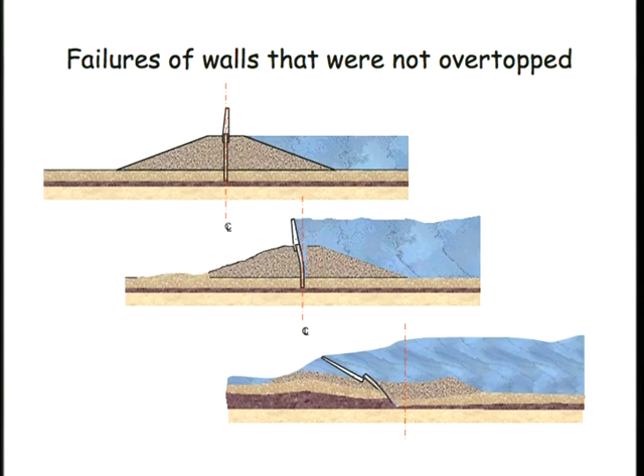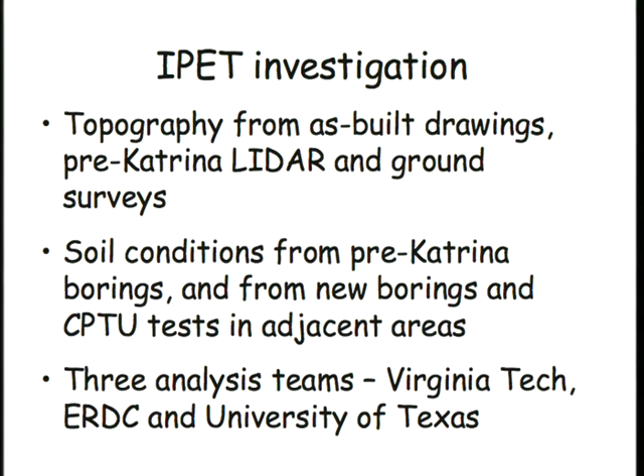The IPET investigation enjoyed a great deal of resources provided by the Corps of Engineers. We had topography from as-built drawings. We had pre-Katrina LIDAR and ground surveys. We had soil conditions from pre-Katrina borings and from new borings and CPTU tests in adjacent areas that were still intact. And then we had 3 analysis teams, Tom and I at Virginia Tech, the folks at ERDC, and Steve Wright at the University of Texas, all working to check each other, do quality control. Everybody did quality control on everybody else's work.

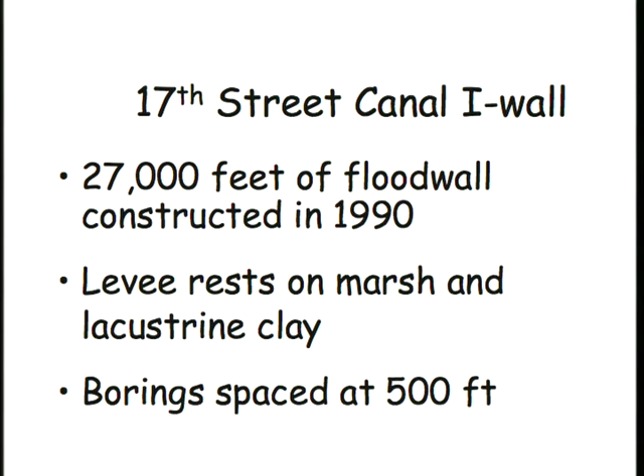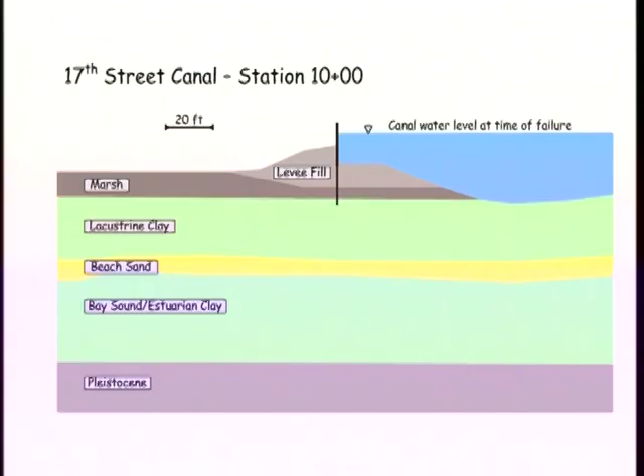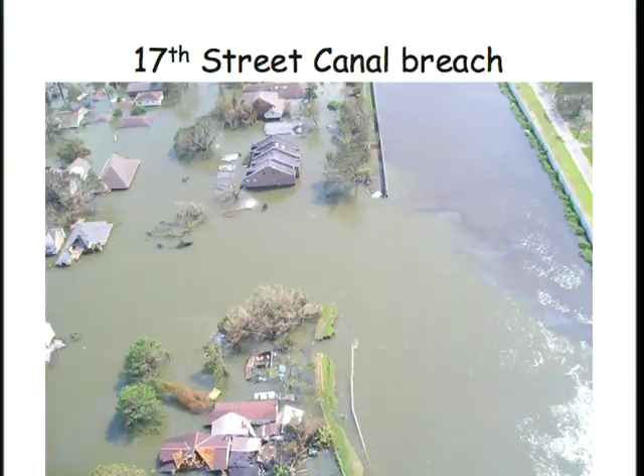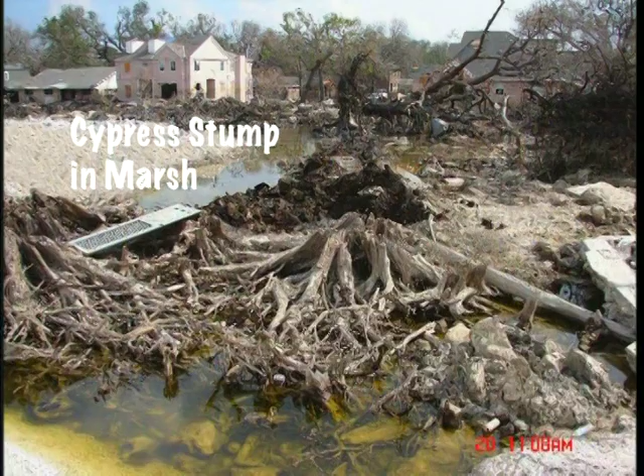The marsh, here you get a very good view of the material. It is highly organic and has a lot of properties similar to peat, but it also has cypress stumps within it. The marsh is material that accumulated and sedimented in a cypress swamp. And so there are remnants of those cypress trees in the marsh.

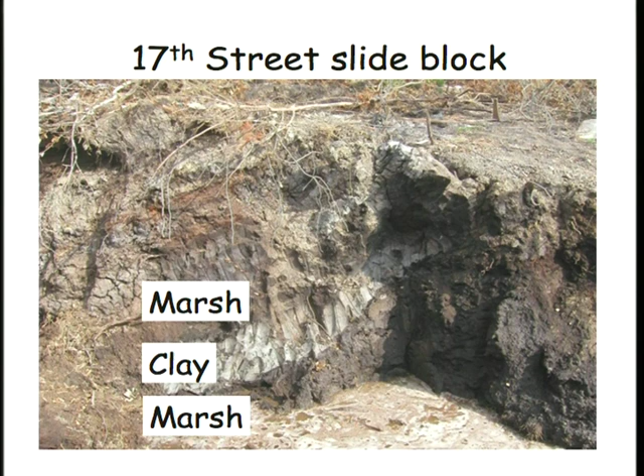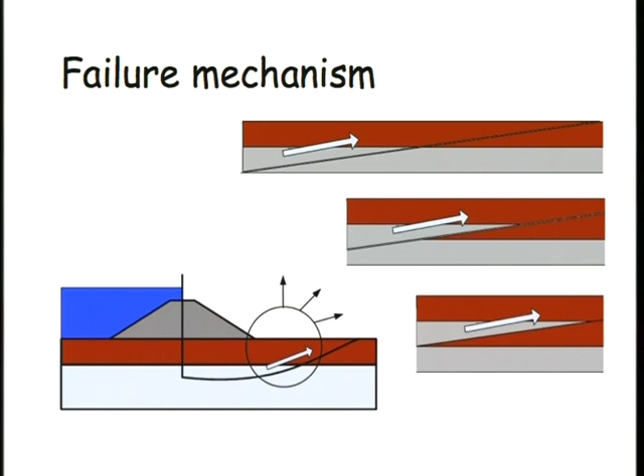Well, starting from something like this, during the failure, this I-wall and this soil in front of it moved inland, slid along a slip surface that would look something like this. So it started out in this position, and with that shearing movement, the chunk of clay was moved up in between two pieces of the marsh material, winding up in this position. And so this shows that the failure surface was down within the clay, and it is only through the failure itself that we wind up with the marsh, clay, marsh sequence.

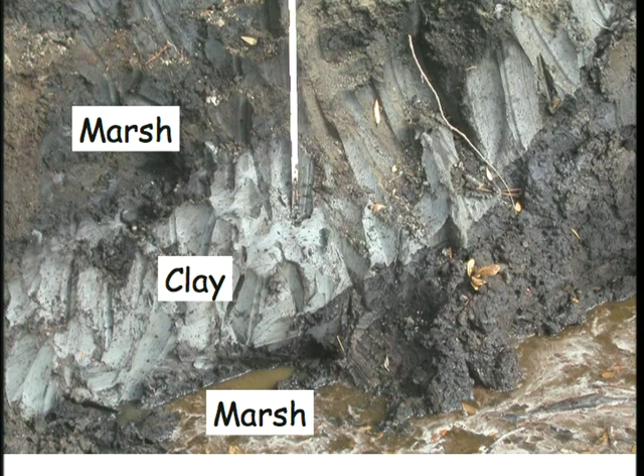Clearly then, the undrained shear strength of the clay was a key thing to understand about this failure. And one of the best pieces of data, it seemed to us, I say best because the scatter was much less for these piezocone tests than for laboratory tests on undisturbed samples. And within the interval of this cone profile, where the cone is penetrating the clay, there's very, very consistent data. And we used a method developed by Paul Mayne to determine the shear strength from the cone penetration results.

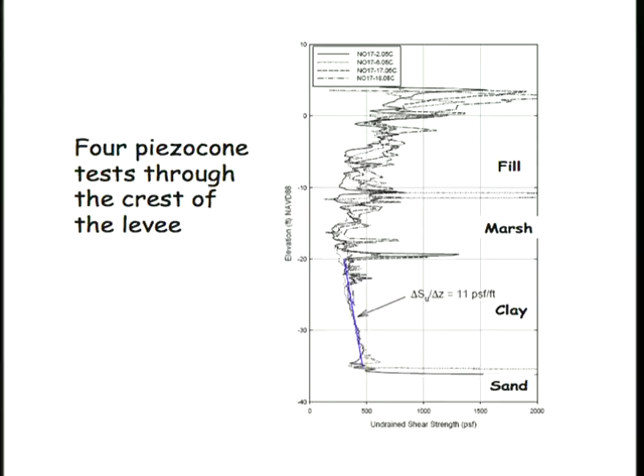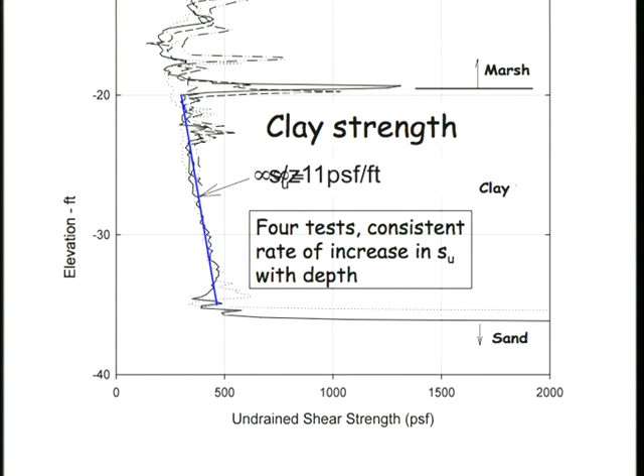The slope of this line here is about 11 pounds per square foot increase in shear strength for every foot you go down. Now that's a very common number. I tell my classes that this number should always be between 8 and 12. And if it isn't, likely something is wrong. And so that fit right within that picture, and these little traces here that don't deviate very much are from 4 different cone penetration tests. And we relied a lot on those cone penetration tests to tell us the shear strength of the clay.

Here's a comparison of a line, the shear strength of that clay, that's 11 PSF per foot going down there, superimposed on the results of laboratory UU tests on specimens from beneath the crest of the levee. The rest of the strength profile, this is the part that's in the marsh, and this part here is in the levee. Lots of scatter, but clearly stronger.

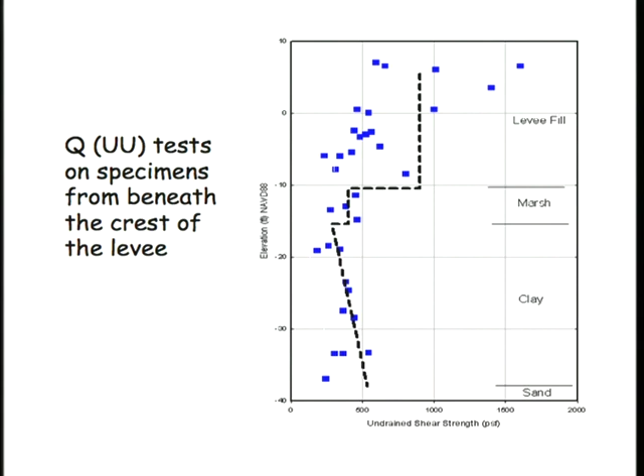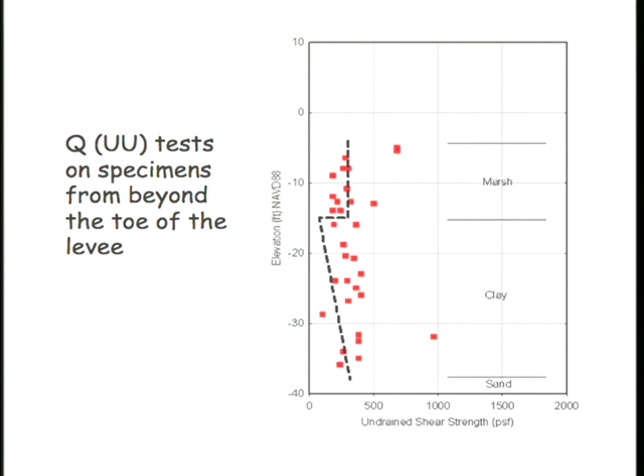And then these are UU tests on specimens from beyond the toe, where the clay had been subjected to smaller consolidation pressures. And this line then, this is the strength within the marsh here, and this is the strength derived or suggested by the cone penetration tests. Perhaps a little lower than the UU test, but a consistent variation.

And so putting those things together gave us what we call the IPET shear strength model. And the most important part of this is down in the clay, because the clay was the weak link. The clay increases in strength at 11 pounds per square foot per foot under the crest and also out beyond the toe. And the only difference is where it starts, and that's determined by the amount of overburden pressure, the pressure to which the clay was consolidated.

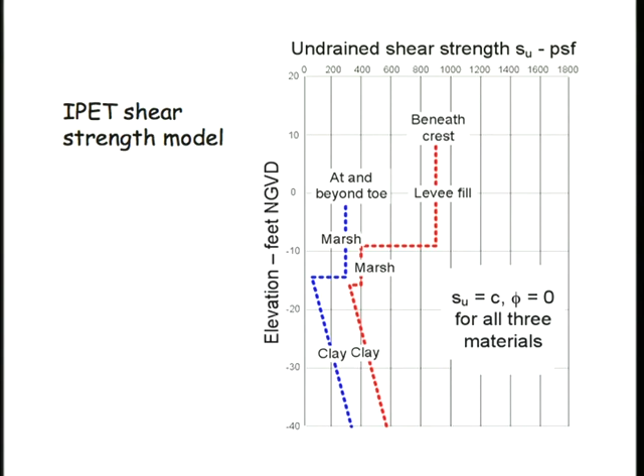Above that is the marsh, and beneath the crest of the levee, the marsh has been compressed very considerably due to the weight of the levee, and then this is the levee fill strength. Out beyond the toe, the marsh is thicker but weaker.

We can compare those lines with the strength profile that was used in design, and that's shown here. So up in the levee, a lower strength than we estimate is the best guess. Here in the marsh, very similar strengths and a similar increase of strength with depth. And then at below minus 20 feet, the district used a constant strength. Not a great deal of difference.

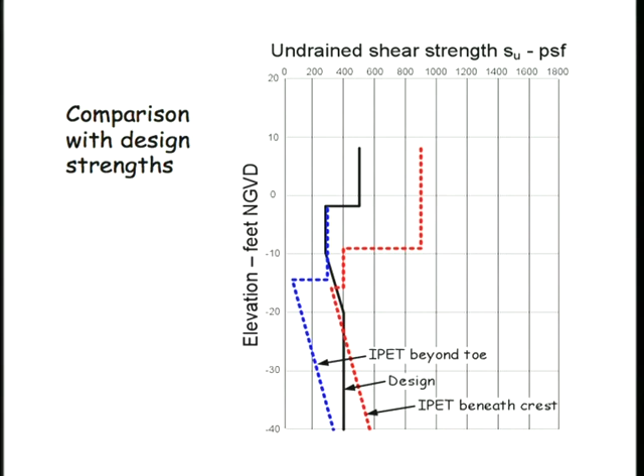In fact, the strength used for design, this black line, shows somewhat lower strengths than we estimate with all the benefit of hindsight. And then out under the toe, beyond the toe of the levee, a considerably lower strength. Now this black line, this was used beneath the crest, beneath the slopes, and beneath the toe of the levee. So we think that this black line is too high an estimate for those areas, but it is just about right or a little bit conservative for beneath the crest.

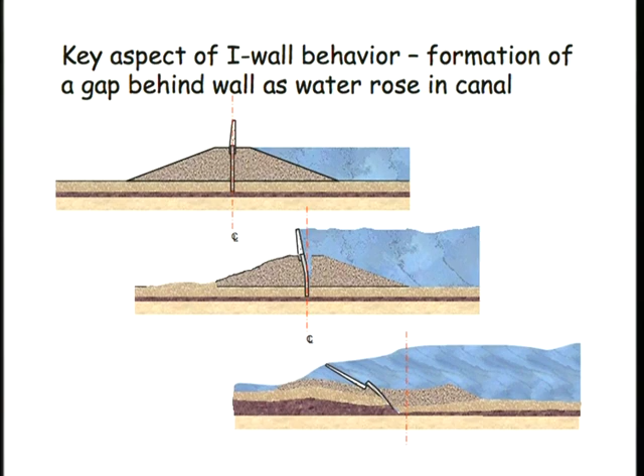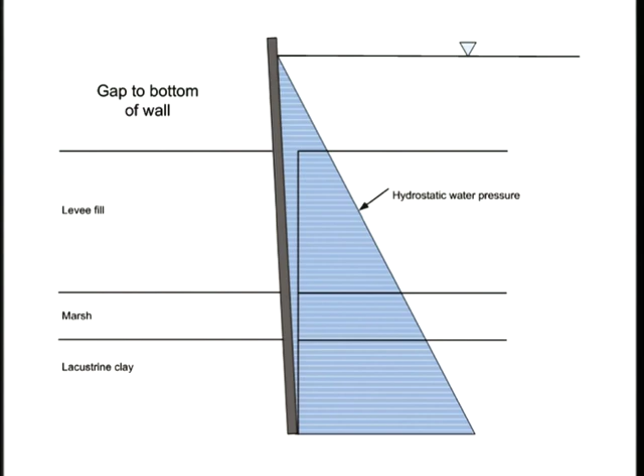But this leaves out what we believe is the most important aspect of the stability of these I-walls. And that is that as the I-walls deflected, a gap formed behind the I-walls. That gap was filled with water. The formation of the gap and filling it with water increased the load on the wall, and we had the wall loaded like this. Hydrostatic water pressure from the water level here to the bottom of the wall.

And if you think about it, this is a higher pressure than the earth pressure. Otherwise, the gap would not have formed. It's the fact that the water pressure is higher than the earth pressure that causes the formation of this gap. So when the gap forms, we're loading the wall with a greater load than just earth pressure.

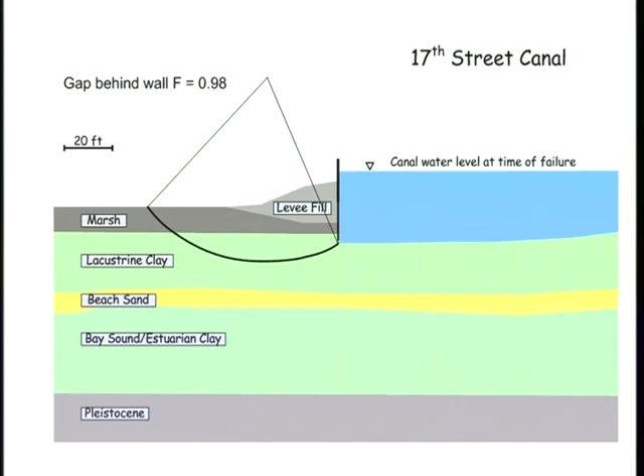And so the proper way to analyze that is to consider that with the gap behind the wall, there might as well be nothing but water over here. It doesn't matter how far it extends. It's water that loads the wall. And the slip surface stops at the bottom of the wall here. So this is a proper modeling of the failure mechanism. And this, combined with those strengths I've talked about, gives the factor of safety very close to 1.

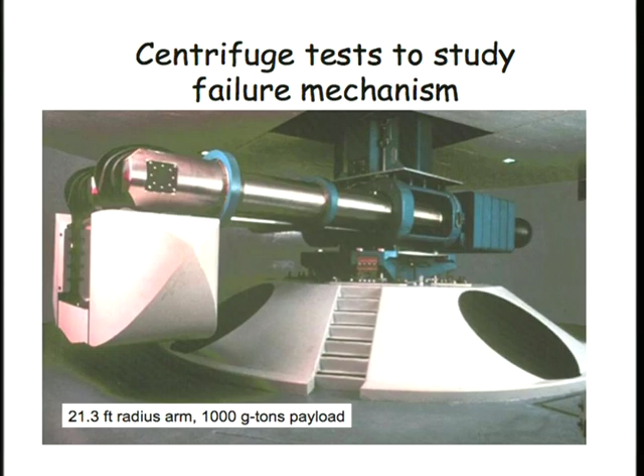Now, confirmation of this mechanism was given by the centrifuge test that Mike Sharp and Scott Steedman performed. This is the large centrifuge at ERDC. This is a photograph taken from a film of a test in a smaller centrifuge at RPI. And those of you who are RPI alumni will notice that I've turned this backward. It's not an insult, it's just that I want things to go in the right direction.

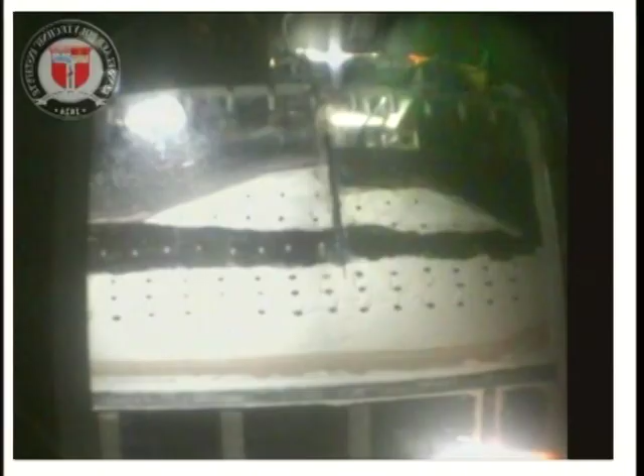And if you look at this photograph here, you can perhaps, you need me to tell you, the water level starts right here. And in a series of photographs, you'll see the water level rise, you'll see the wall start to move, and this soil out here begin to slide. And if we do that, one click at a time, see the water level coming up there, and you can see the wall beginning to move. At this point, there is a gap behind the wall. It's obscured a little bit by the fact that when that gap formed, a triangular chunk of soil calved off the rest of the clay back here and began to fall down and follow the wall.

Let me go back through that sequence again, because I want you to notice this time, watch these markers down in here, and you can see that these markers near the top of the clay move as the markers within the peat, within the marsh. I began to call this the layer formerly known as peat. But so here we go, raising the water again. And you can see those markers at the top of the clay now begin to move the same as the marsh, like that.

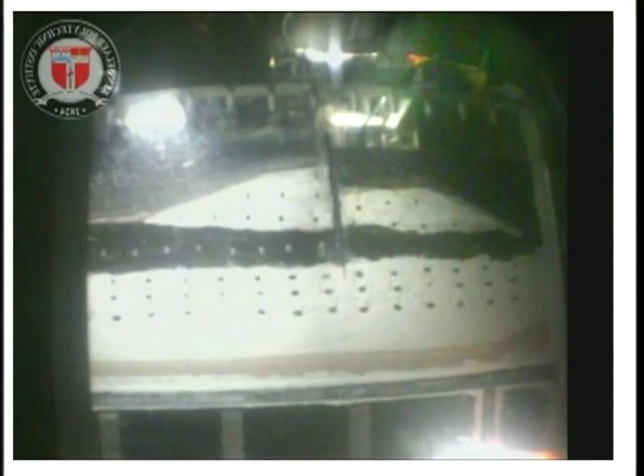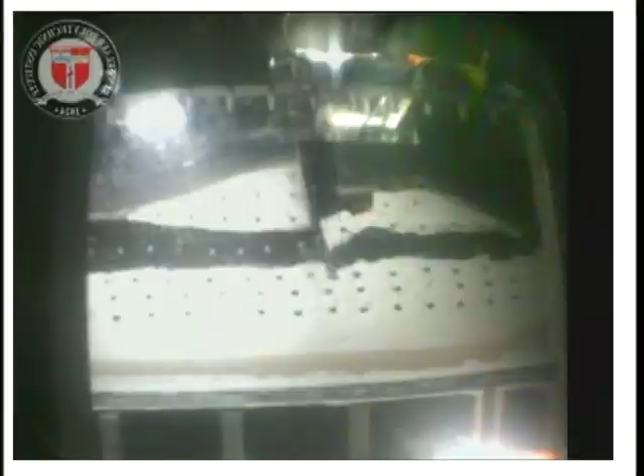Now, those centrifuge tests were very useful in showing the same mechanism as we deduced from the stability analyses. And here in the field, in a number of places where the walls hadn't failed, there were these gaps that had formed but didn't lead to failure.

So the main factors responsible for the 17th Street I-wall failure were, number one, the design strengths were too high beneath the slopes and beyond the toe of the levee. They were fine beneath the crest. And the design analyses did not include a gap between the wall and the levee fill on the back of the wall.

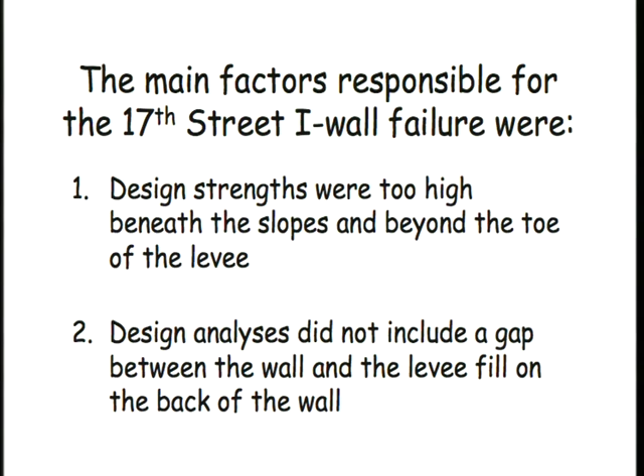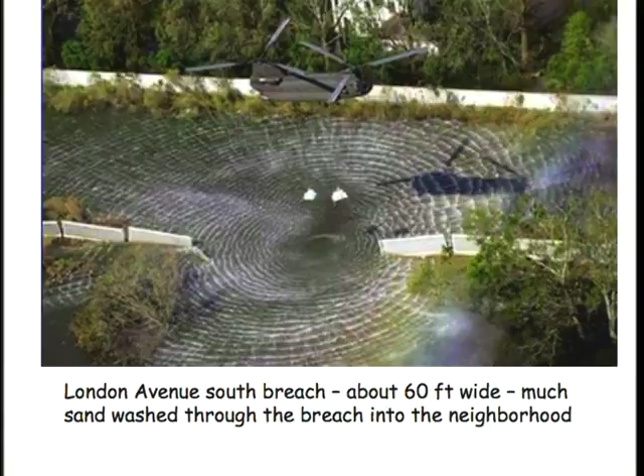Now let's move to London Avenue. London Avenue had two failures, south and north. The soil conditions are different there. There's sand beneath the marsh. And this is the breach. It's only about 60 feet wide as compared with about 400 feet wide at 17th Street. But a large amount of sand washed through this breach into the neighborhood. There were very high flow velocities that carried a lot of sand into the neighborhood.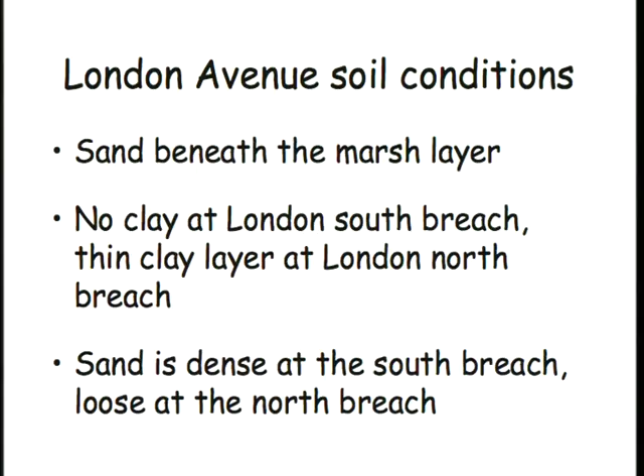The soil conditions at London Avenue were that there was sand beneath the marsh layer. There was no clay in the profile at the London South breach, and there was a thin clay layer at the London North breach. The sand is dense at the south and loose at the north, and this has to do with the energy environment where the sand was deposited.

Cross-section at the south looked like this. Notice that it's foreshortened here. This drain over at Warrington Drive is further over than it shows in this picture. And the canal water level at the time of failure was about in this neighborhood based on the eyewitness tests and so on.

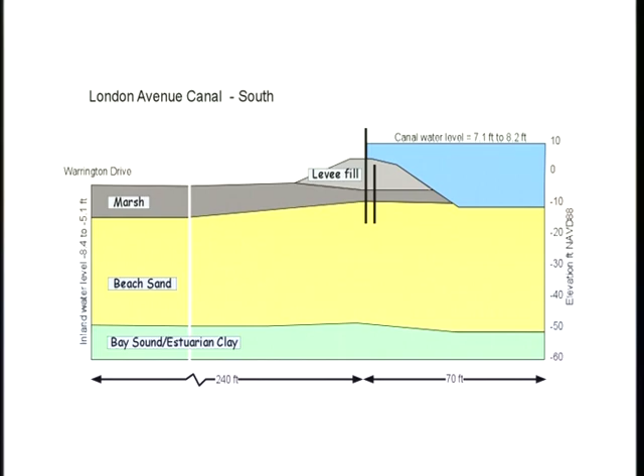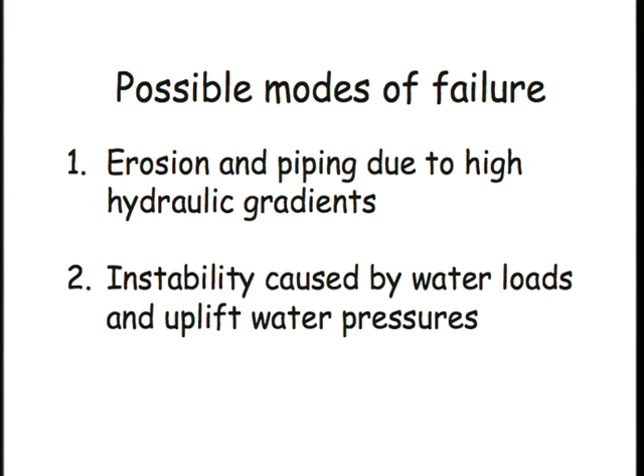Possible modes of failure were, number one, erosion and piping due to high hydraulic gradients in the sand. Number two, instability caused by water loads and uplift water pressures in the sand. Now, when we form a gap in sand, the situation is slightly different because the gap can only go down to the top of the sand.

You can't crack sand. And so below the top of the sand, we would still have seepage through the sand coming down the back of the wall here. And that would cause the water pressure to drop off with depth more rapidly than the hydrostatic pressure. But we would also have some active earth pressure there. So the loading diagram is somewhat different when we have sand beneath the marsh.

Seepage analyses: we looked at 4 different cases that varied with the inland water level over at that Warrington Drive drain and our possible different heights of water in the canal at the time of failure. We did finite element analyses of those conditions, and it came up with 4 different possible uplift pressure distributions shown by these 4 dotted lines.

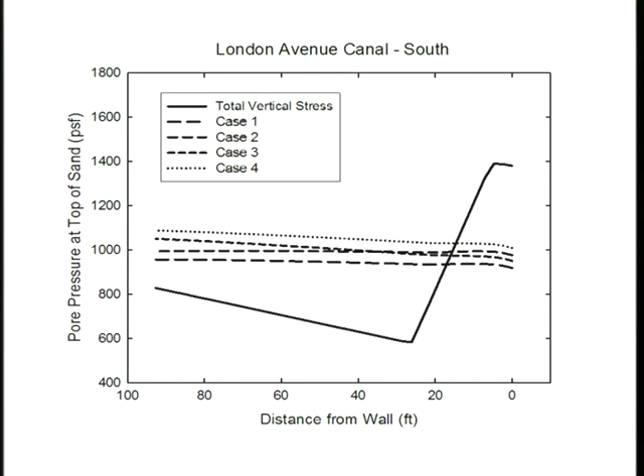The solid line down here, this is the total overburden pressure. Any water pressure higher than this would tend to lift the marsh up, and when that happened, of course, you're not going to get a simple upward movement of an intact layer of marsh. You're going to have the marsh rupture. And when the marsh ruptured, then water would begin to flow through that rupture.

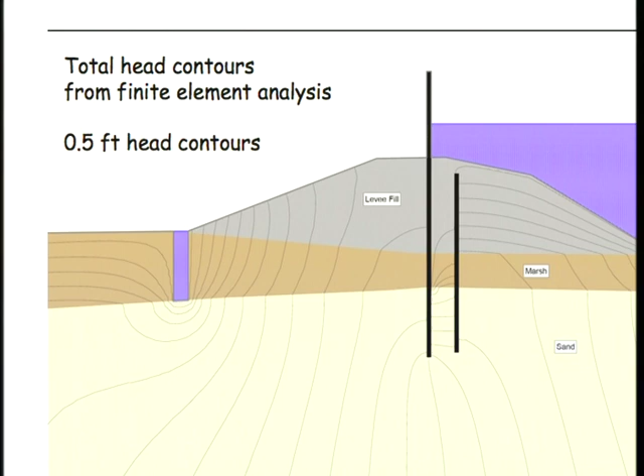Exactly how that would happen, you can't say, but you can say that certainly did happen. And so water would be flowing upward out of a rupture in the marsh. What you see here are the results of finite element analyses with a rupture through the marsh. These are 0.5 foot head contours, and the fact that they're crowded so close together here means that there's a very high hydraulic gradient right at the base of the rupture.

If we now do a normal stability analysis, taking into account the high water pressures in the sand here, this is sand. It has a high friction angle, but it also has these high water pressures in it. And we calculate a factor of safety of about 1.2 with a gap down the back of the wall to the top of the sand.

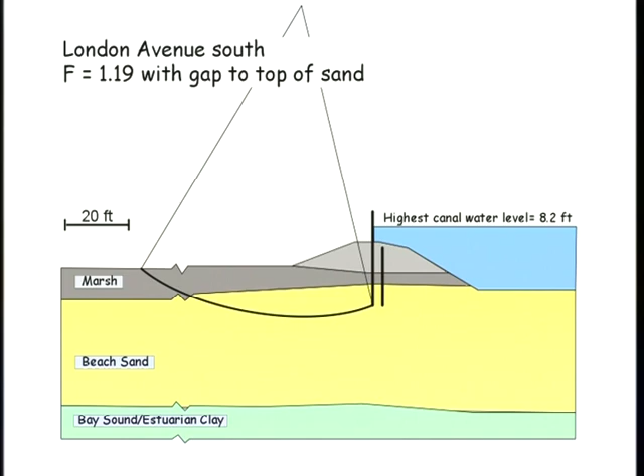We did 4 different analyses varying the canal water level and the inland water level, and for each of those, we calculated factors of safety for instability, that slope stability mechanism, and those were all above 1 by quite a margin. They varied from 1.2 to more than 1.5. Factors of safety against erosion, though, with those high hydraulic gradients at the base of the rupture in the peat, those were all less than 1. And so we believe here at the London Avenue South breach that the mechanism was more likely erosion and piping than simple instability due to high uplift pressures.

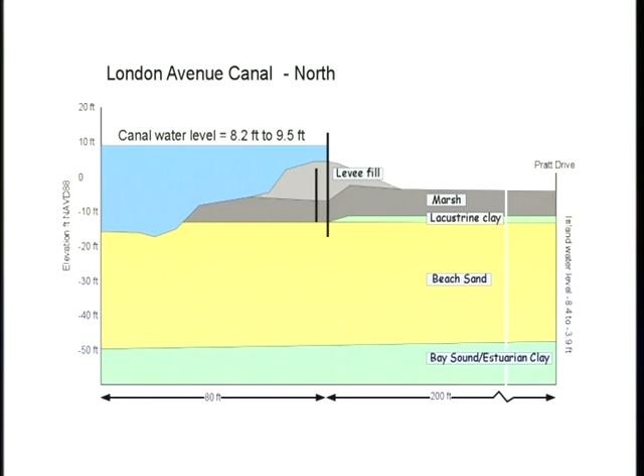At London Avenue Canal North, the situation was very similar. This layer of lacustrine clay here does play a critical role here. When we begin to get seepage down and through the sand, of course, the clay blocks that seepage just the same as the marsh. And again, we did 4 different analyses with 4 different conditions, 2 for the inland water level here and 2 for the canal water level at the time of failure.

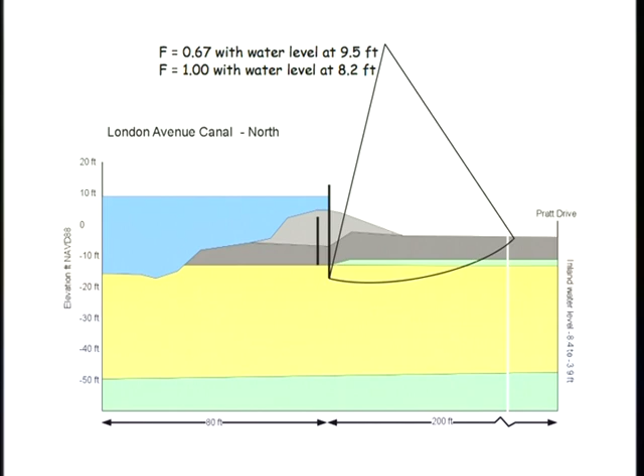The sand was looser there and the friction angle lower. So the factors of safety against instability were smaller at London North than at London South. The highest one was about 1, and the rest were below 1. And so these are the factors of safety for our 4 cases, factors of safety against instability, and these are the factors of safety against erosion and piping.

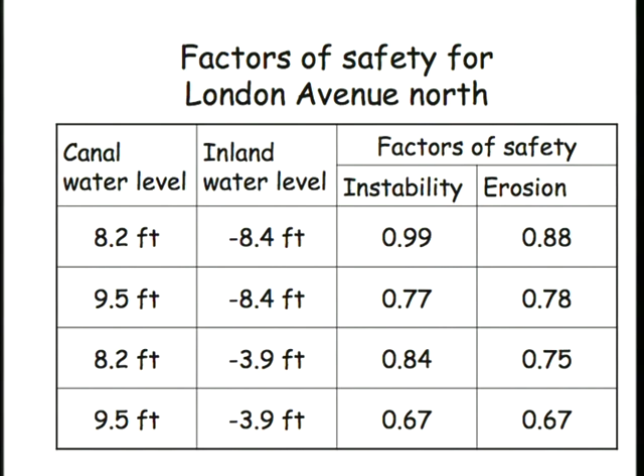And roughly speaking, they're about equal, and it's much harder to tell which might have been the more critical mechanism at London Avenue North. But in the end, it doesn't matter very much. There was the same kind of mess when it was all over.

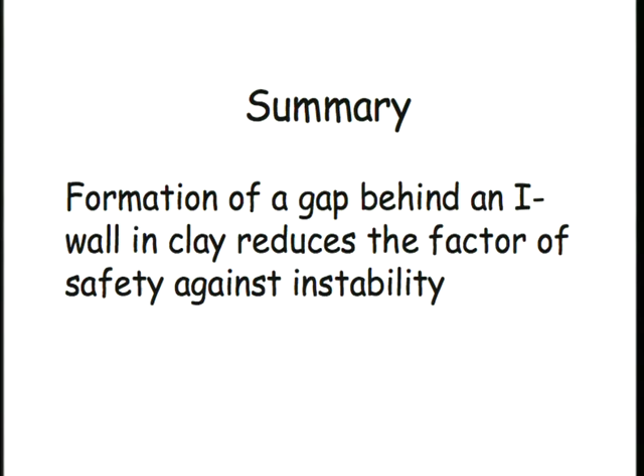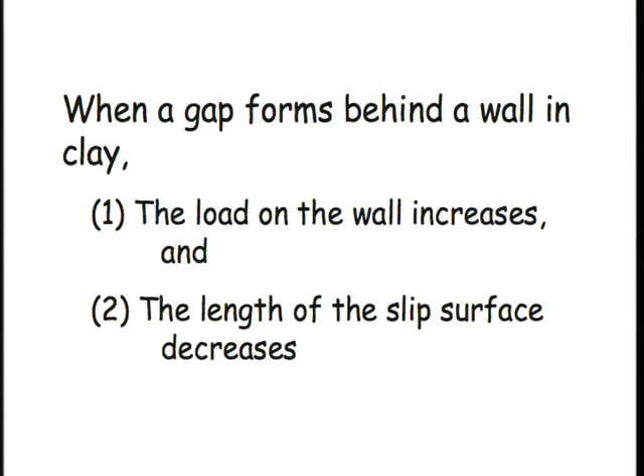So in summary, I have just a few points here. Formation of a gap behind an I-wall in clay reduces the factor of safety against instability for the reasons that I've said. Because when a gap forms behind an I-wall in clay, the load on the wall increases. That water pressure is higher than the earth pressure before the gap formed. And the length of the slip surface decreases. So we don't have such a long slip surface to develop resistance.

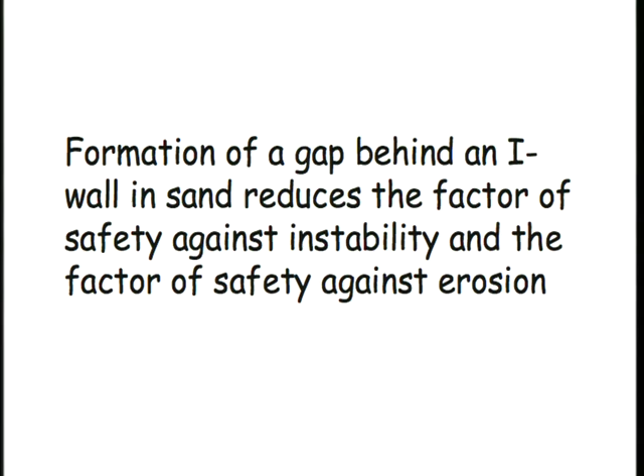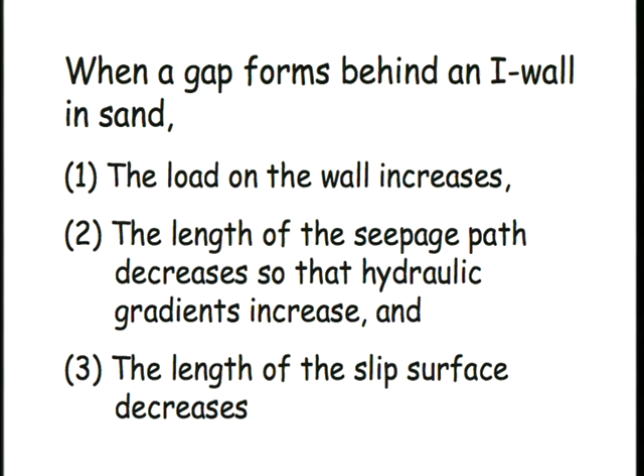Formation of a gap behind an I-wall in sand reduces the factor of safety against instability and the factor of safety against erosion. Both things suffer. When a gap forms behind an I-wall in sand, the load on the wall increases, the length of the seepage path decreases so that the hydraulic gradients increase, and the length of the slip surface decreases so we can't provide as much shear resistance.

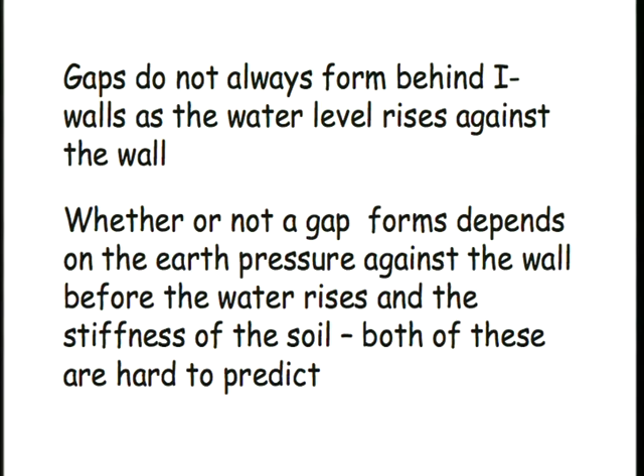Now, gaps do not always form behind I-walls as the water level rises against the wall. There are many situations, many examples where gaps did not form. But whether or not a gap forms depends on the earth pressure against the wall before the water rises and the stiffness of the soil. Both of these things are hard to predict.

Rather than trying to predict whether or not a gap will form behind an I-wall as the water level rises, it should always be assumed for design that a gap will form, because this provides a more reliable basis for design. Thank you very much.